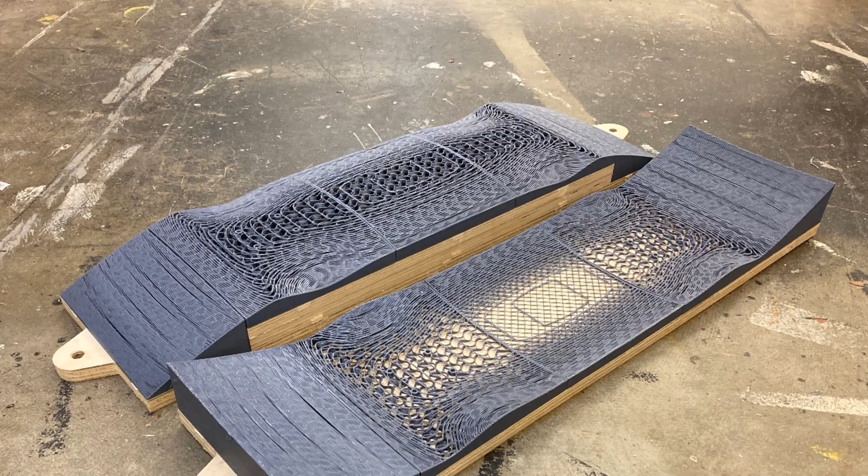However, one of the coolest features about this board is that it was pressed using 3D printed skateboard molds. In this video, I'm going to share how I printed the molds and pressed this skateboard, and tell you a little bit about why I think 3D printed skateboard molds have so much potential and may even be better than more traditional wood or concrete molds. So let's jump right into this.

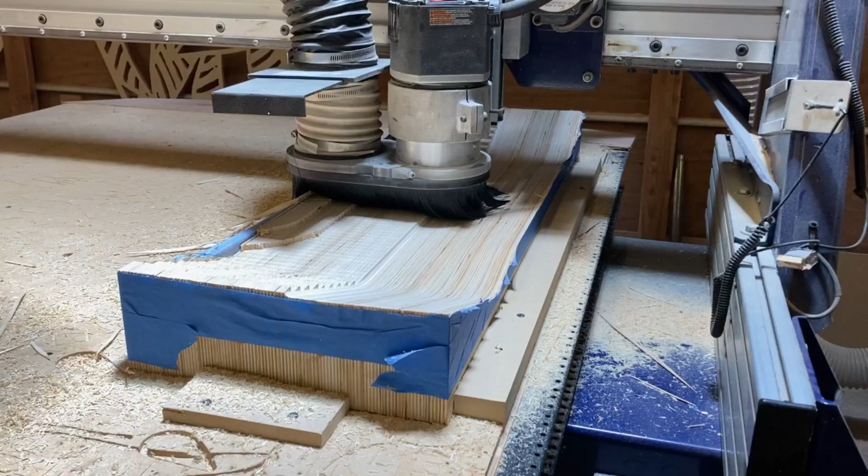Until a few weeks ago, all the molds I've ever made to create a skateboard have been made by carving material away from a foam or wood block. This method of building is called subtractive manufacturing because you are removing material from a block to create your final product. While this is clearly an effective method, it can have some drawbacks. It can be labor intensive if you are carving a mold by hand or creating your own stock material.

It can get expensive. CNC routers, which are basically machines that automate the sculpting of a block, don't have negligible costs for most makers and require a good bit of space. And it can be wasteful, particularly with female molds, because so much of the material just gets carved away.

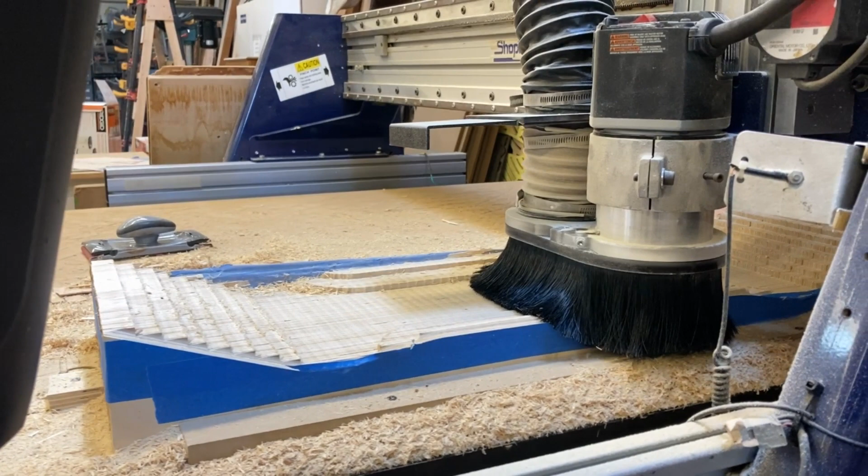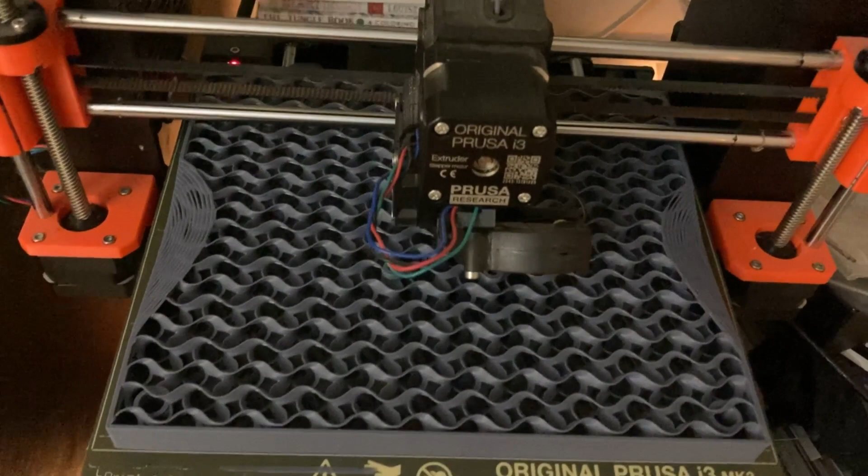An alternative to subtractive manufacturing is additive manufacturing, which most of us more often hear referred to as 3D printing. 3D printers are automatic building machines that work just like a CNC router, except they progressively add material rather than cut material. There are many different types of 3D printers, but FDM, or Fused Deposition Modeling, seems to be the most prevalent technology at the consumer level and the most affordable.

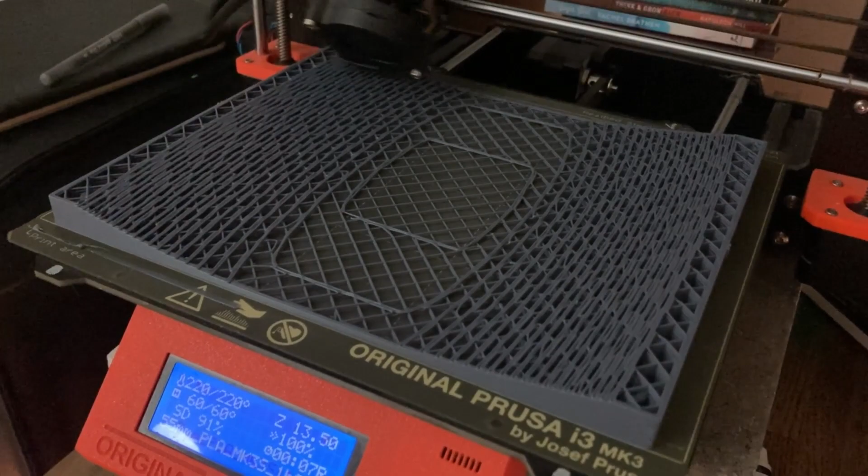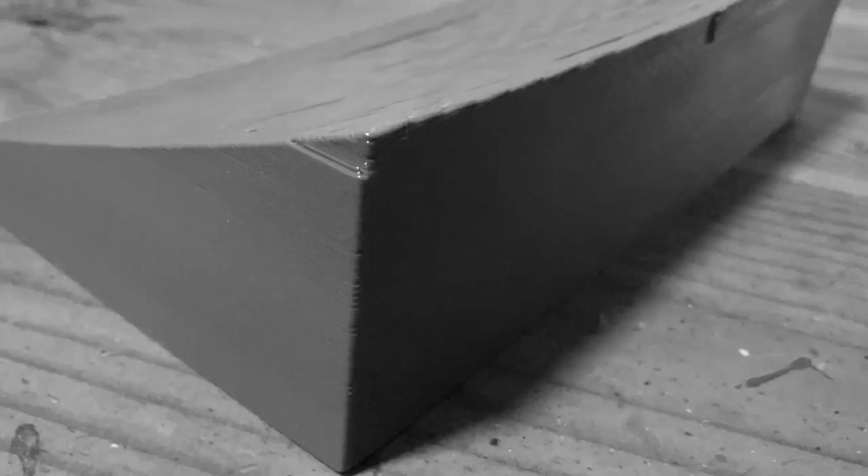There can be much less waste with a 3D printer, as it only uses material to add to the part. There are no chips or sawdust. While anyone that has used a 3D printer knows that failed prints can occur more often than we'd like, any waste material could be processed back down into filament. One downside of 3D printing is the amount of time it can take to produce a part relative to other manufacturing methods.

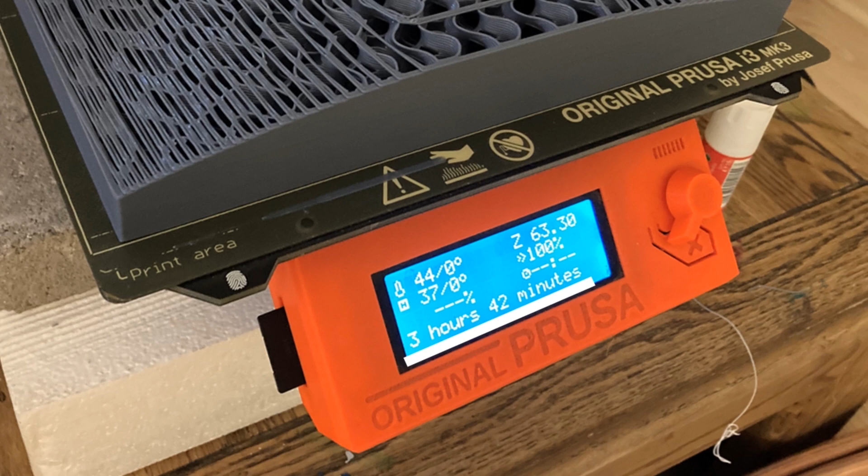After seeing Chris from Good Roads share his 3D printed molds and process on YouTube, I was intrigued to give this a shot myself, particularly to see if lightweight PLA 3D printed molds could be effective in more of a production level application under higher loads like 40 tons. If you don't know of Chris and the Good Roads channel, I highly recommend you check out his creations.

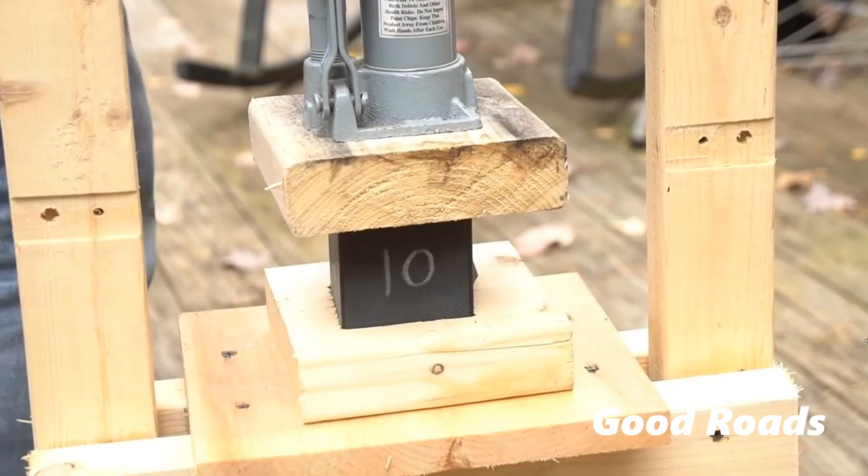Thankfully, Chris had also published a video on destructive testing some 3D printed sample pieces under a load. I also found a video about strength testing infill patterns from CNC Kitchen, another great YouTube resource. So, to get started, I chose to make a redesign of my Flow Style skateboard mold.

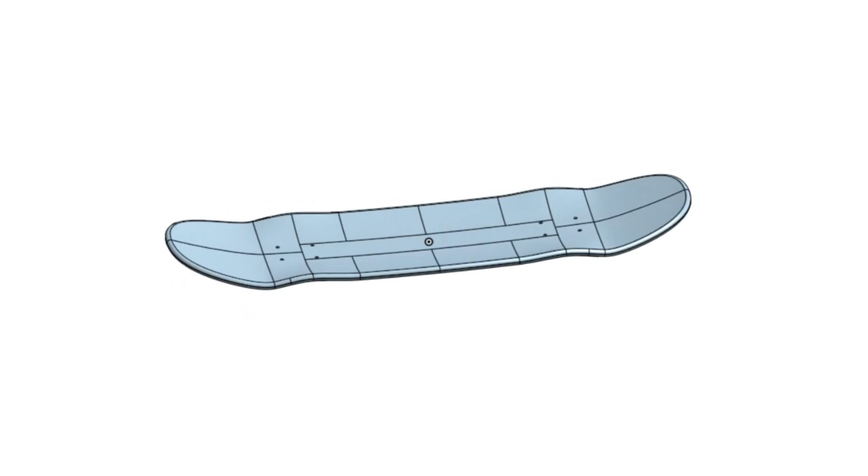The Flow Style board is a symmetrical board that has rocker and wheel flares, and is probably my favorite shape to skate because it has a great mix of functionality and comfort. I originally designed it in 2019, and I felt it was time to give it an update. It would also be a great opportunity to push the limits of this mold because of its unique and complex curvature.

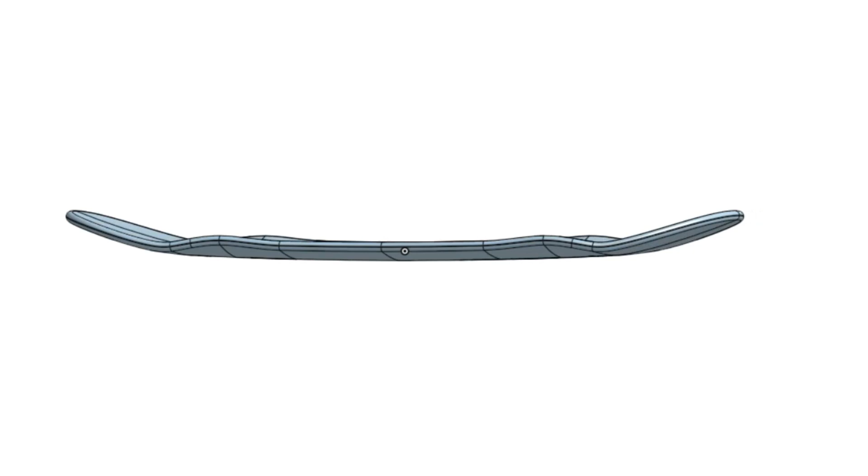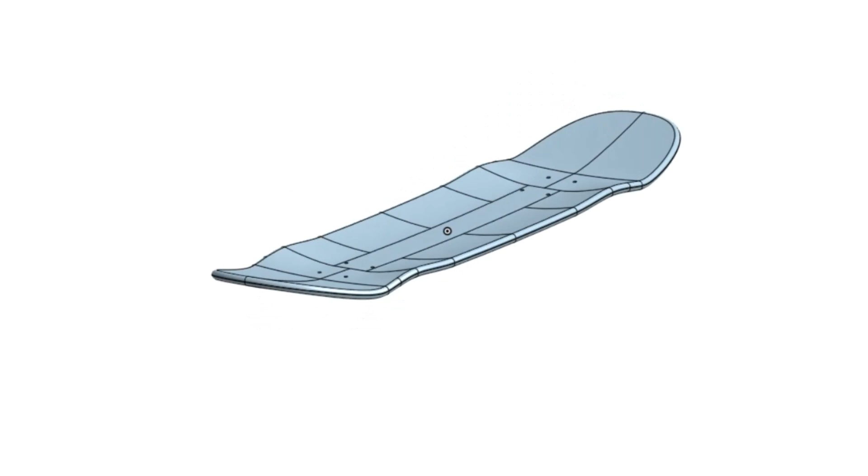The updates included adding concave into the kicks, making the kicks spline driven rather than just a radius and an angle, switching the concave from radial to more of a progressive tub, and changing the wheel flare position and distance between the kicks. I won't get into the functional details of these changes in this video. Rather, I'm just highlighting the complex geometry involved in the shape that I'd be testing.

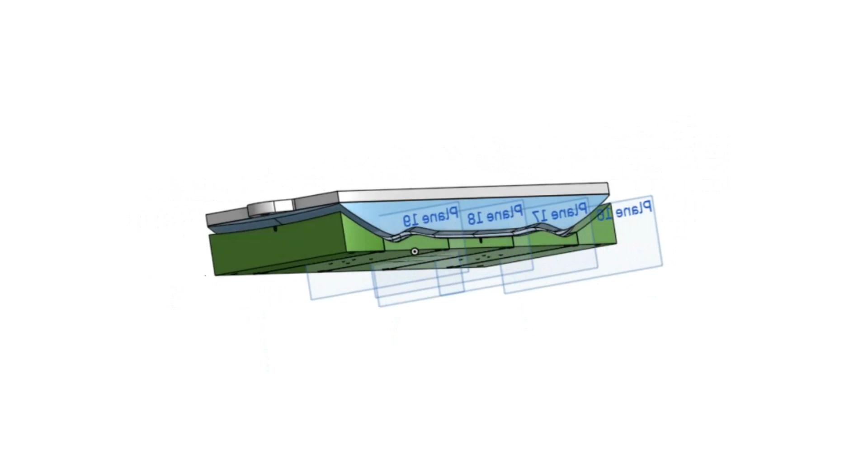I designed the molds to just press one deck at a time, as I want these to be pretty consistent, and I'm not using a glue applicator, so getting more than one deck glued up within the working time of the glue can be risky.

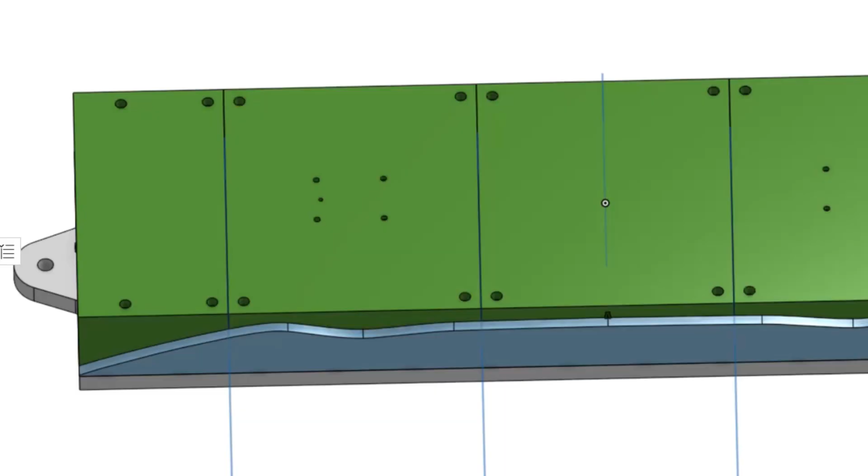Truck holes were designed into the mold to provide a guide for drilling so that drilling could be done precisely and before the board was removed from the mold. Other features were added for deck registration if needed, such as if alternative wheelbases were desired.

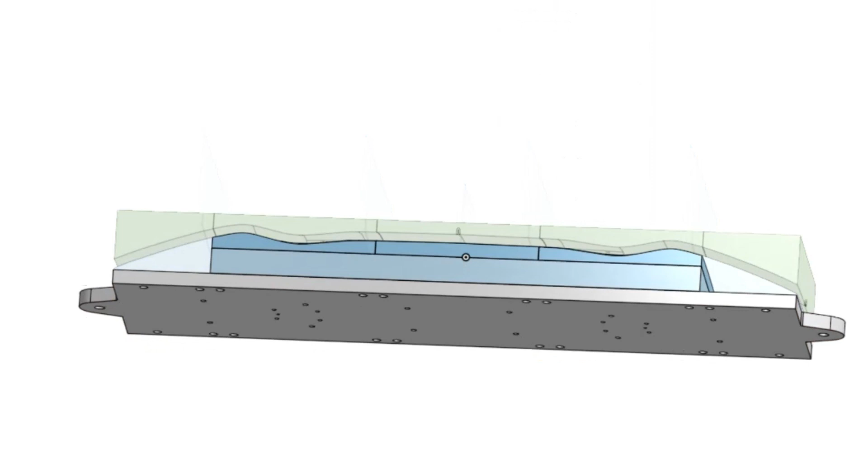I made the mold as small as I could to fit the range of board sizes I planned to make on the mold, and divided the mold into sections small enough to fit on the bed of my 3D printer. I noticed the 3 middle sections of the male mold were very tall with what felt like wasted material space and print time, so I cut out a good portion of the material so that I could add a sheet of plywood underneath them.

Bore holes on the back side of each print section would serve as cavities to install threaded heat set inserts, which would be used to mount the sections on a plywood backing board.

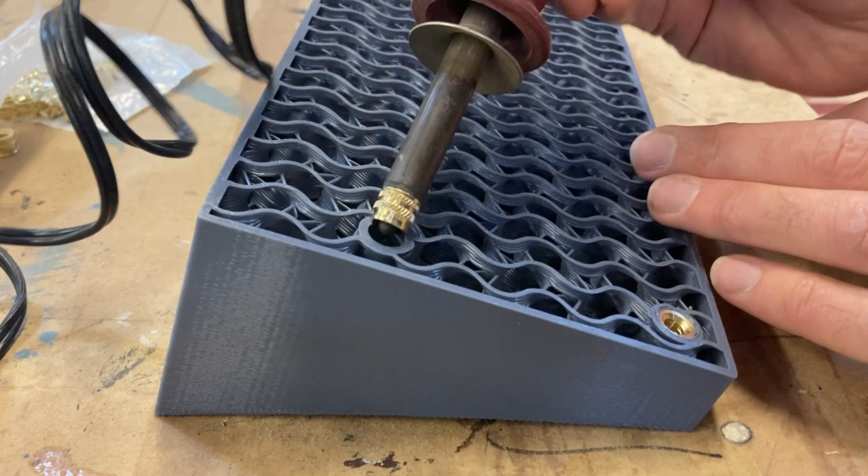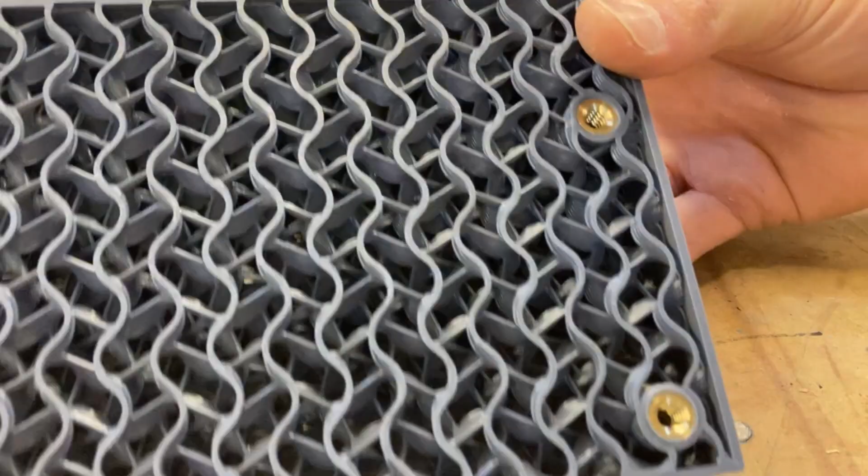I also added an overhang with holes on the backing board, which would serve as my mold alignment when I inserted a long bolt through them. They were positioned in such a way that the veneer I was using would not interfere with them. The plywood backing board and male substructure would be cut out on a CNC router.

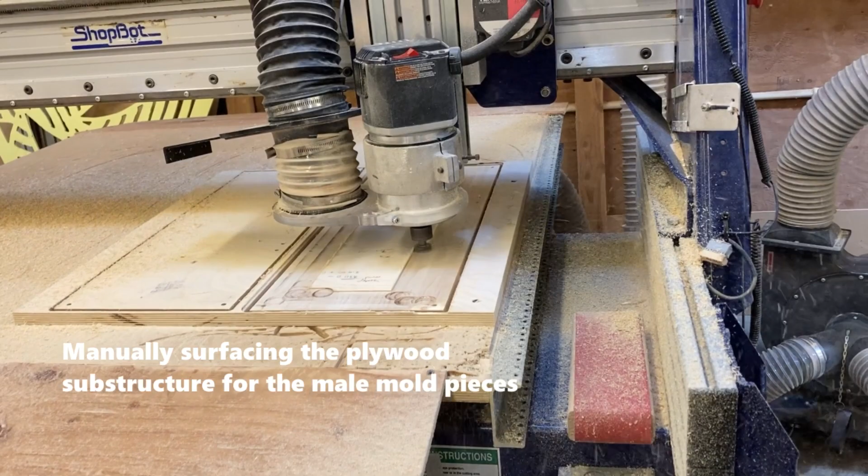Of course, I realize the point of this video is to show an alternative method where you wouldn't need a CNC router, but there are many different ways to build alignment into your molds without one. For example, you could 3D print templates and jigs to provide precision in your builds. Once I finalized the design, I needed to set up the files for 3D printing.

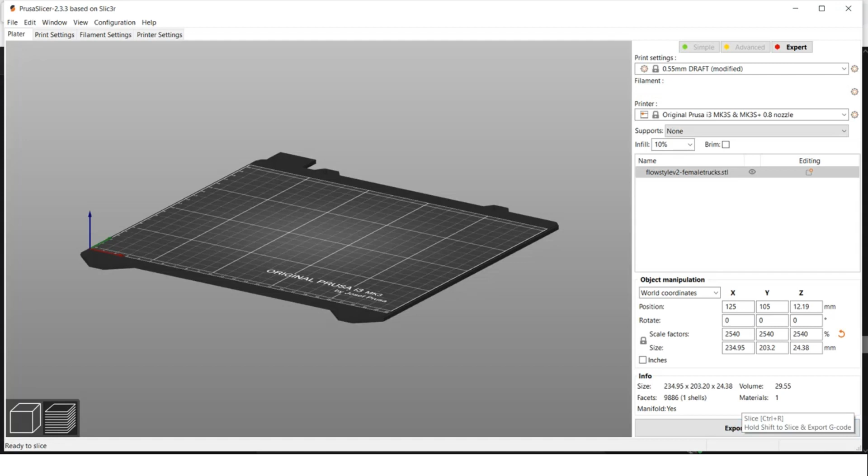After doing some research, I decided to give 10% infill a shot. It seemed like it would hold up to the 40 tons of force I was going to apply. And when I say infill, I'm referring to the amount of material used inside the mold. For example, 100% infill would create a completely solid block, and 10% infill would create material in 10% of the inner volume of the part, while the other 90% of the volume is empty space.

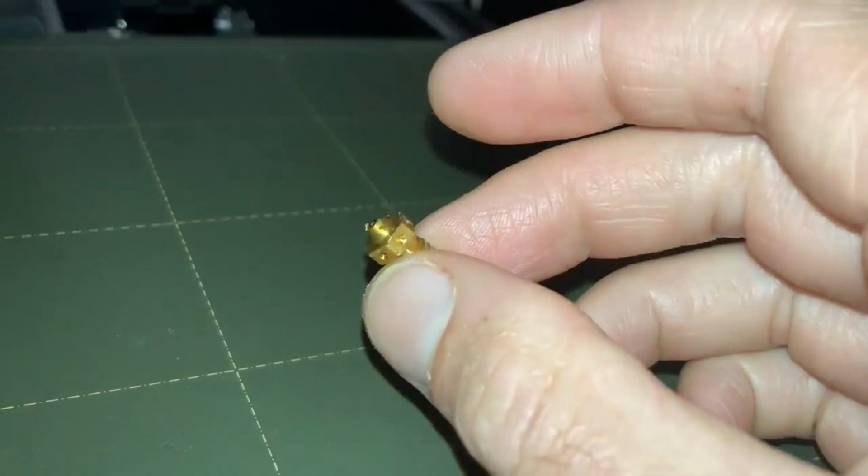I also changed out my default 0.4 millimeter nozzle to 0.8 millimeters. A larger nozzle will extrude more material at a time, which produces thicker layers and therefore reduced printing times. The ability to print details is sacrificed with a larger nozzle. However, I didn't need the level of detail provided by a smaller nozzle, so there wasn't any notable sacrifice with these skateboard molds.

While I'm mentioning hardware, I'll also mention I'm using a Prusa i3 MK3S 3D printer, which I've been really happy with. I'm also using the Prusa Slicer software to generate the G-code for the printer.

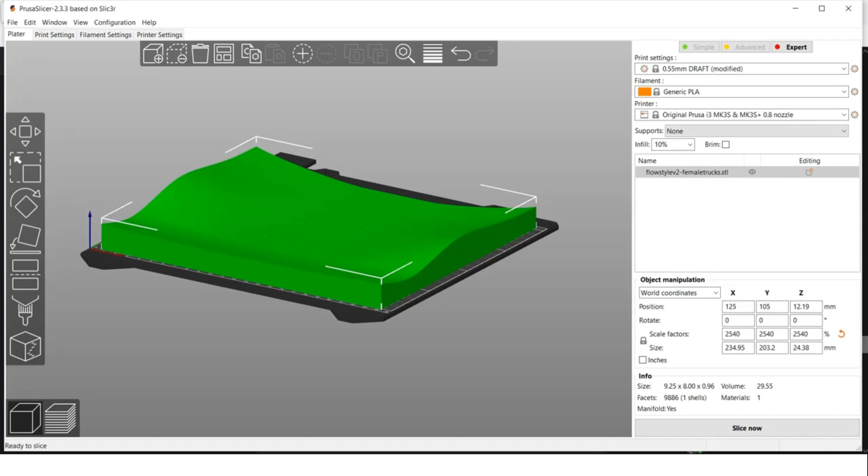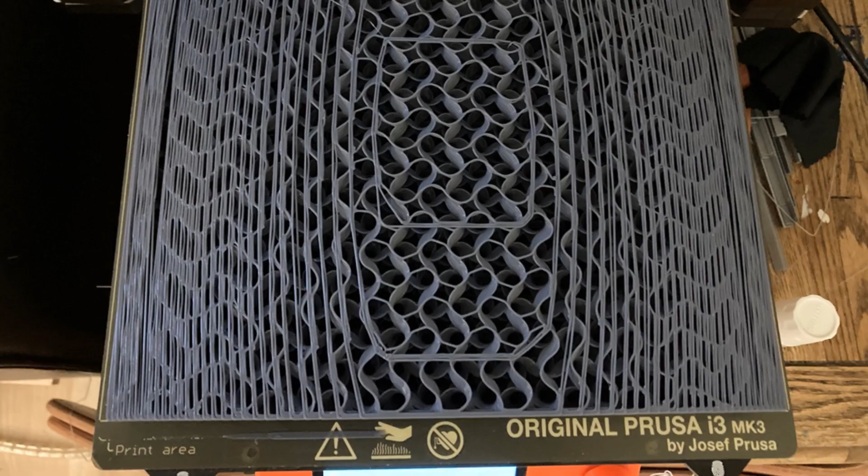For the material these molds would be made from, I decided to use PLA as it is the cheapest printer filament, probably the most common filament, and seemed to have good enough mechanical characteristics based on the research I had done. It tends to print more easily and reliably than other filaments, so I could reduce my risks of failed prints as well. For the infill pattern, it looked like gyroid infill was the fastest while providing great strength.

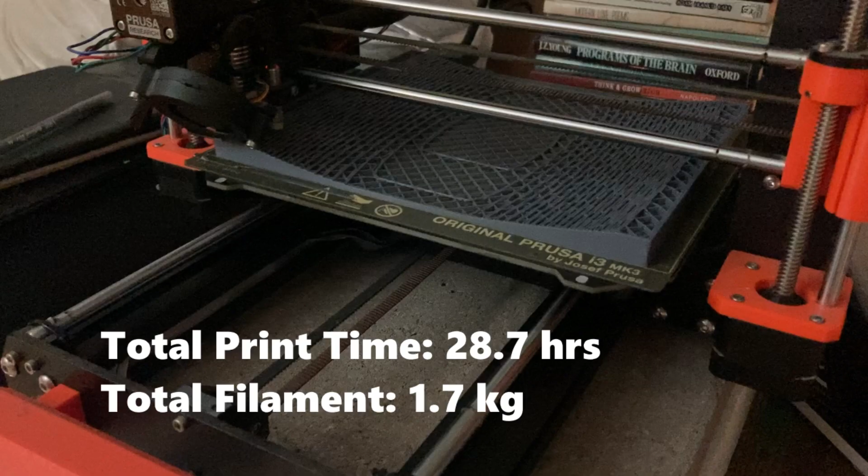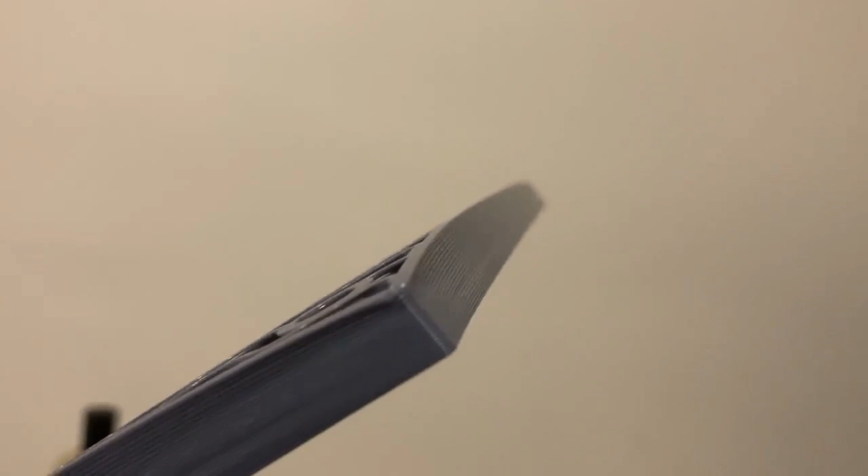2 of my prints failed. First, one did because the bottom warped. I resolved this by applying glue from a glue stick on the bed. The other print failed due to a layer shift, and while I'm not sure what exactly caused this, I greased the bearings on the 3D printer and I didn't have this issue again.

Once the prints were made and the backing board was cut, I installed the threaded inserts and mounted everything together. Then it was time to actually press a board.

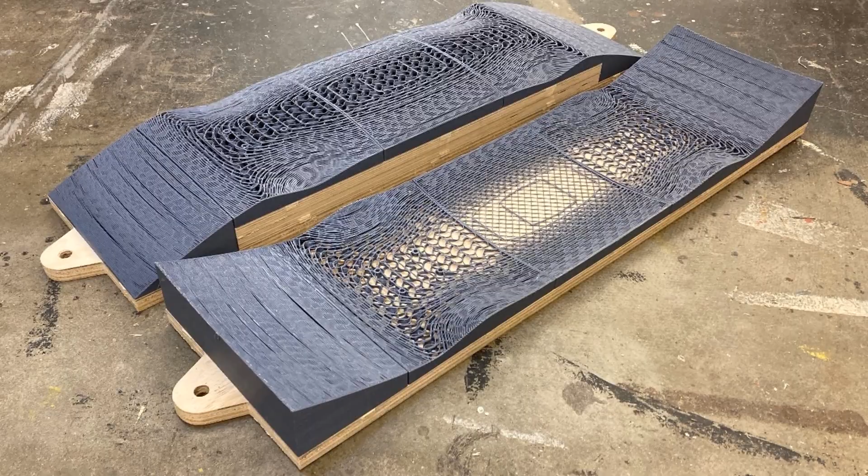On the first press, I loaded the jacks until the molds created full contact with the veneers. I didn't have a gauge to measure the force, but both jacks could have been jacked more. I left the boards in the press overnight.

One effect I was hoping to see with these 3D printed molds was reduced cure time and springback due to their porosity. With traditional molds, the only part of the veneers that is exposed to the air during pressing is the edge around the perimeter. With a 3D printed mold, and particularly one without top and bottom shells, I expected the larger surface area exposed to the air would aid in curing. I have plans to answer this question better in the future, but for now, let's keep going.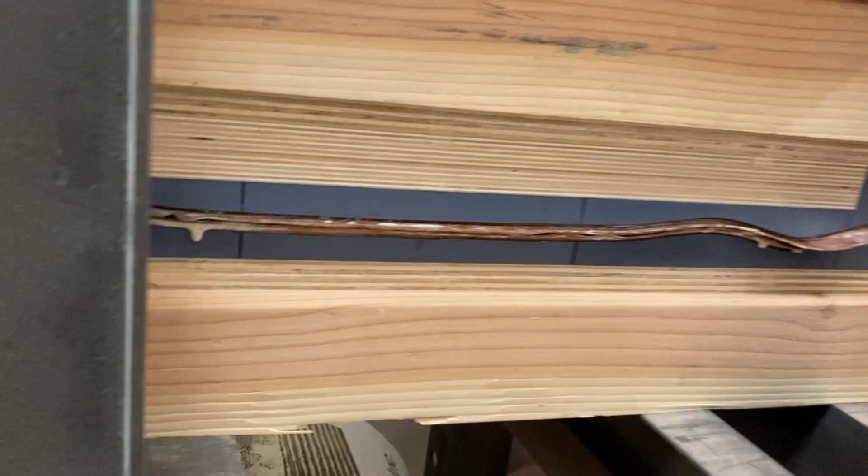I did a second press a few days later with some red gum eucalyptus veneers I had that I couldn't use in a deck to sell because they had too many inconsistencies. Or at least that's the thought that I had. So I figured I should test it to find out what's really acceptable for the veneer quality. This time I pressed the jacks all the way to see if the mold would hold up, which it did.

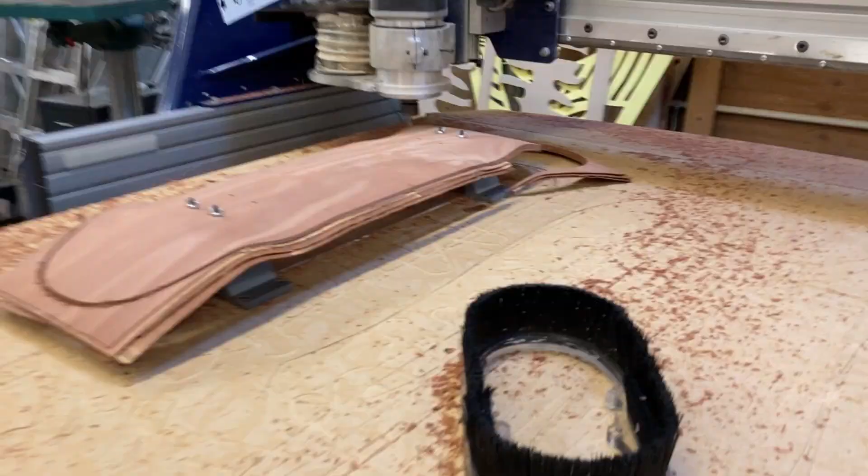Although when I took the red gum out of the press, it had some indentations on the top surface from the gyroid infill pattern and some marks from the seams of the mold pieces that I couldn't really sand out. I think the eucalyptus was a little softer than the maple, and the extra load I applied on this press may have just been excessive. However, I imagine simply putting some sort of barrier veneer on either side and adjusting the mold surface offset accordingly in the mold design could eliminate this potential issue if you do encounter this.

Since the red gum board had questionable veneer, I decided this would be the prototype for me to skate, and I'm so glad that I did. The board feels absolutely amazing. With these two boards, I haven't seen any issues with the glue lines, and I haven't seen any issues of warping.

To me, this is pretty awesome that 3D printed molds can be so effective, because I didn't think low infill molds would hold up to the large amounts of pressure that is required to press multiple boards at once or create more complex geometries. I recently released some updates to SkateCAD that will help with 3D printing molds, and hopefully this means designing and building skateboards has never been easier. SkateCAD is the browser-based skateboard and skateboard mold design software I've created based on OpenJSCAD, available at skatecad.com.